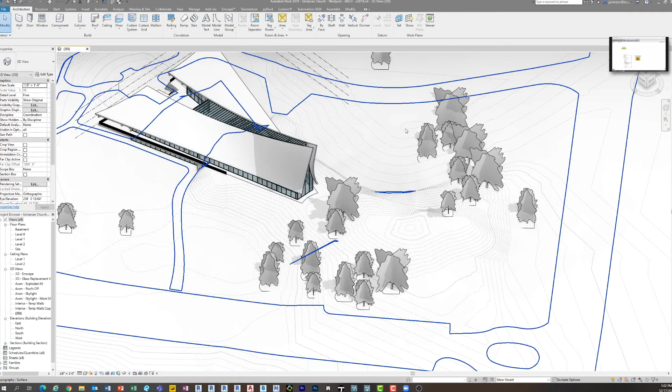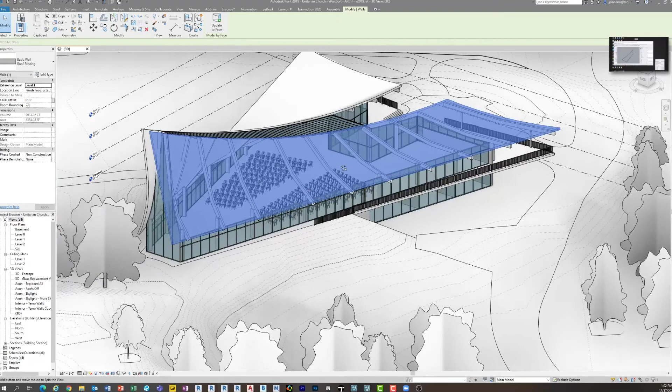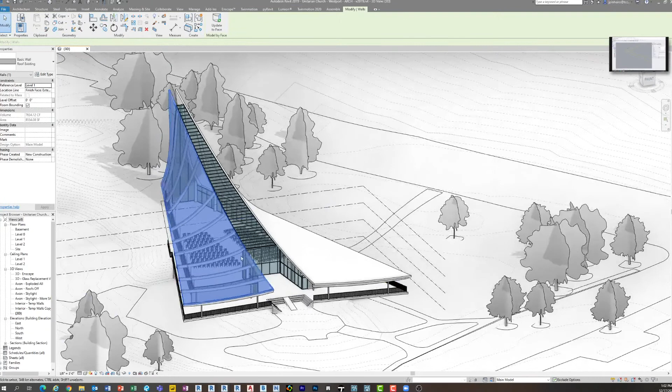Right now I'm showing Revit - this is a Unitarian church we're working on in Connecticut. As I spin around it, you'll see it's got a pretty funky roof shape. It's actually pretty neat, a really cool looking building, wood framed, built in the 70s I believe. I was tasked with modeling it. Modeling the roof took a lot of flexing and pushing and pulling a mass surface until it got right, then I did a roof by face, which is mirrored - very nice. But then came this whole thing - if I hide this roof for you guys, I had to show these huge timber beams that were underneath it.

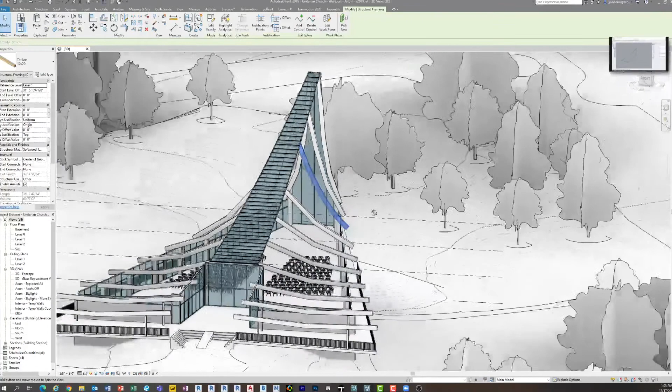It seems pretty simple, but then you start looking at it, and the curve at every single piece under this roof is different. So placing a beam along this is pretty challenging. I could have taken a couple different options, like making an adaptive component and trying to get it to deflect to it.

But I remembered a blog post that Marcello posted, which happens to be the cheat sheet from page 203 of his book, and that's how I did it. So what I'm going to do real quickly is show you how this works.

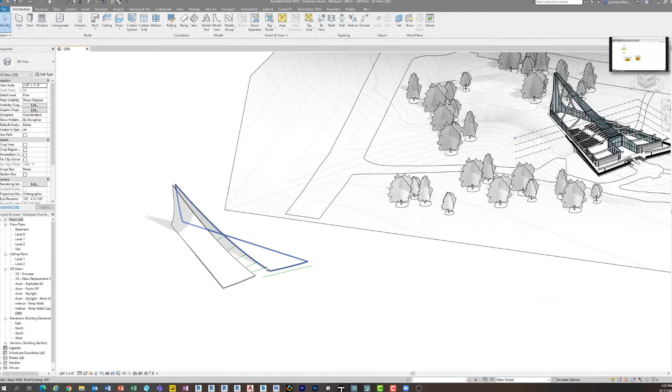So now I'm off to the side, and this is just the roof shapes and the model lines. You have a roof shape here and a roof shape here, and then I've got these model lines underneath it, representing the beams. If you were to look straight down on this in plan view, those would be your beams, showing the path of the beams.

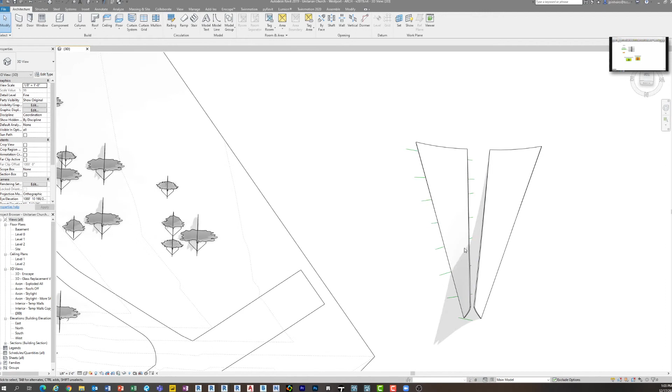What Dynamo's doing when I run this script is it's going to take those lines and project them using what's called project input onto that surface. From there you get points and curves, and it's going to place a structural beam along those points. So I could make these shapes pretty much whatever I wanted - right now I'm just drawing a line. It's going to take them, project them onto the surface, and then place a beam there.

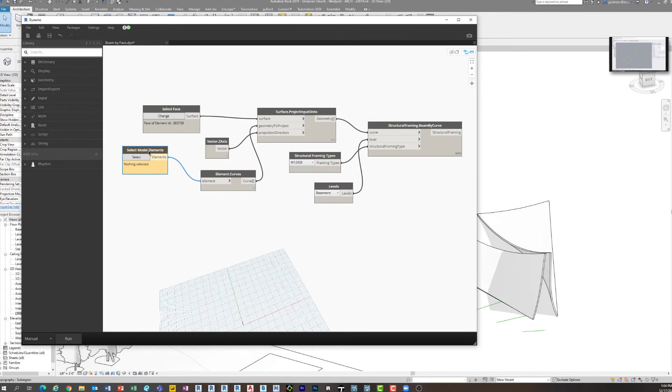So all you have to do is select model elements. Here I'm going to select my model lines, and then make sure I select my face. I want to make sure you guys can see both things running here. If I look really quickly at the Dynamo script, it's pretty straightforward.

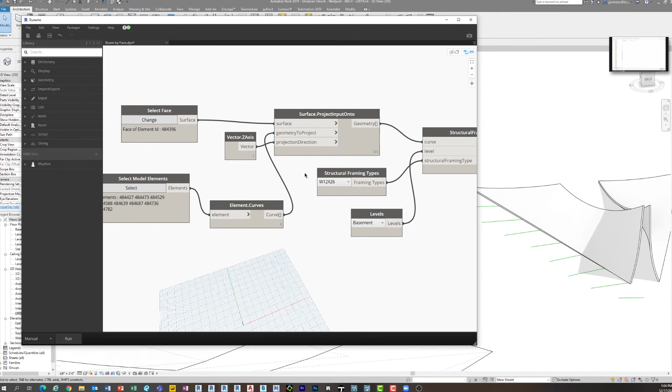You select your elements, and here it's actually projecting those elements onto the surface. Then there's a Dynamo out-of-the-box node called structural framing beam by curve. A curve is essentially a line in Dynamo, for lack of a better term, and it's going to place them along that. If I click run, Dynamo's going to chug for a second.

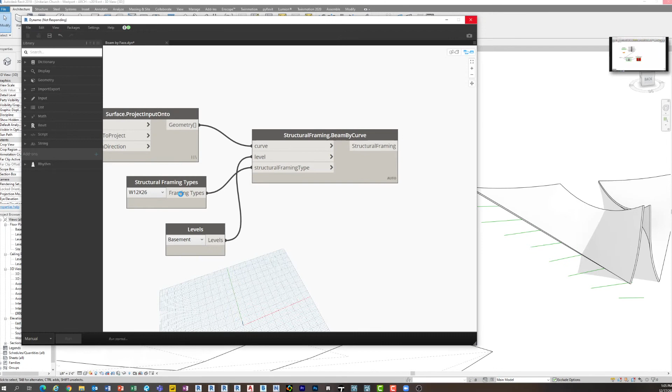As you can see, I actually picked a W12 beam - I probably should have picked the wood beam on this one, but that's okay. So you can pick the beam type. Now Dynamo's running, and it's projecting, and then it's going to place the beams on that surface.

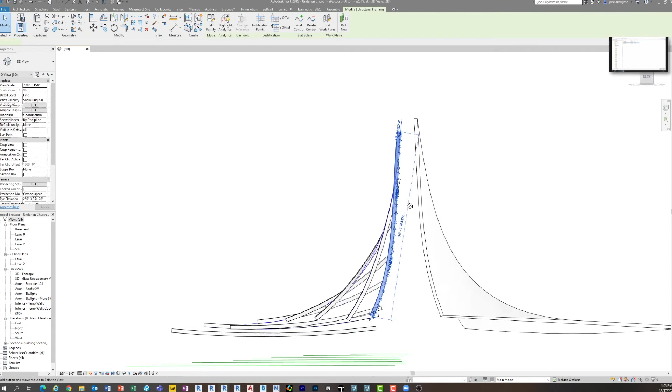So here we go. And now if I hide my roof for now, you'll see I have beams, and they're actual Revit beams, following that surface. Super cool, and honestly super practical, because you may run into crazy roof designs in your lifetime, and I'm sure we all do. So that's the example.

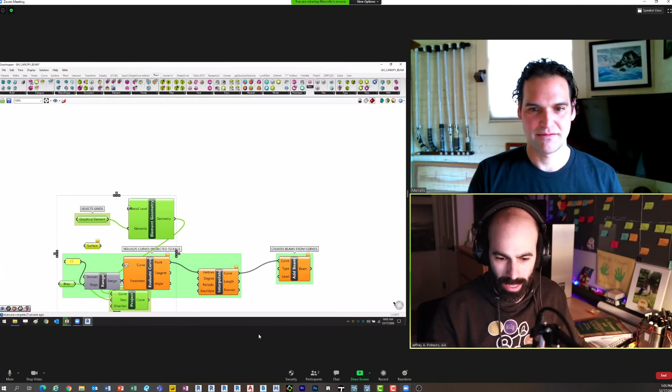So with that, what I'll do is quickly jump back over so that we're seeing everybody again. All right, I know you couldn't see that, Marcelo, but I think you imagined what was going on. Good, so that's the example in Dynamo. I thought that was a cool example because it's practical to the point where you could actually use it right now on a project, maybe something like a crazy canopy.

Probably the most practical use of a roof shape like that, as far as dealing with the space underneath it, is a canopy. The wavy canopy is something that's probably more useful. I've used that technique now on a couple other things.

That project onto technique is super powerful. If you have a surface, a wavy curve, anything, taking just a straight line, projecting it onto it, and then using that to draw things is extremely powerful. So with that, I'll let Marcelo take over and talk about how this looks in Rhino slash Grasshopper slash Revit and that whole good thing.

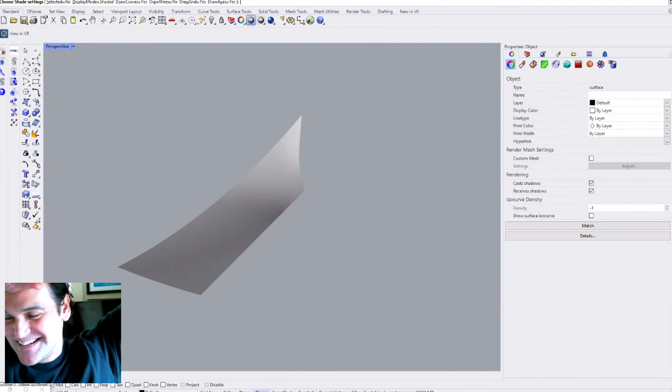Okay, can you see my screen? Yep, I can see it. It looks like I see Rhino, and I see one side of the roof of the church I just showed everybody. Right, okay, that's correct.

So the idea here is I'm going to show that same example, but in Grasshopper, and how you may reimagine using Grasshopper to do this example. So when Jeff built the roof surface in the massing environment in Revit.

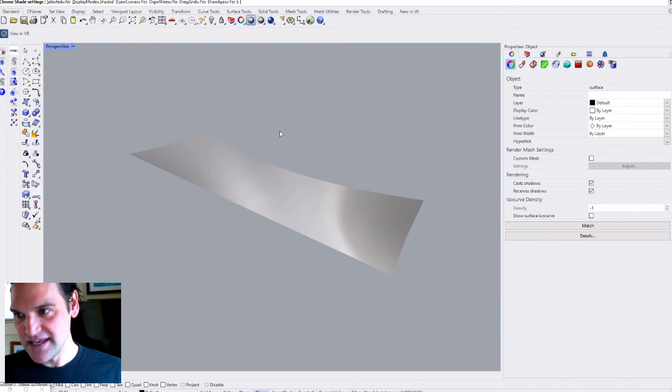Now, if, for example, you have another situation where you model the roof surface in Rhinoceros because either you're more comfortable modeling it or someone gives it to you, this is that particular surface.

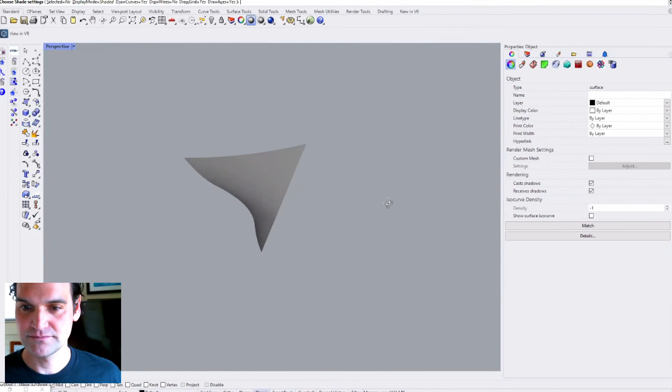Which I should jump in on actually, because that's probably a more practical use of this than anything, because I would say 90% of the time my experience with Rhino is someone modeling it and giving it to me, and then me having to do something with it. That's usually most of the experience. And then you're like, well, what am I supposed to do with this? This is a perfect example, I think, of interoperability mixed with geometry and practicality.

Okay, so it brings up another good example of why, if you know how to do it in Dynamo, would you need to learn to do it in Grasshopper? Well, what if, like Jeff said, you don't get that surface in Revit and you get it in Rhinoceros instead? Then what do you do? Well, the Dynamo solution is not going to be as efficient for you as using the Grasshopper solution. So let's just get into it.

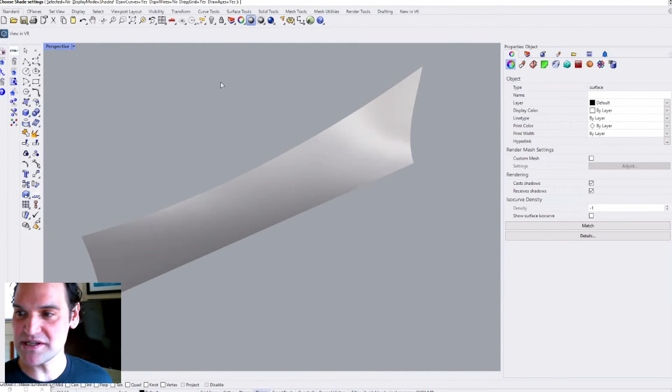All right, real quick, here's the surface. So what you want to do is get this eventually referenced into Revit, and for that we're going to use the new Rhino inside Revit technology.

Now, I set kind of all this up, but quickly, inside of Revit. Where's my Revit? Hang on a second. I've got a lot of windows here, Jeff. Multiple monitors, right? Yeah, multiple monitors. Here we go, here we go. I do have multiple monitors. Okay, oh gosh, I just had it. Okay, whew, here we go.

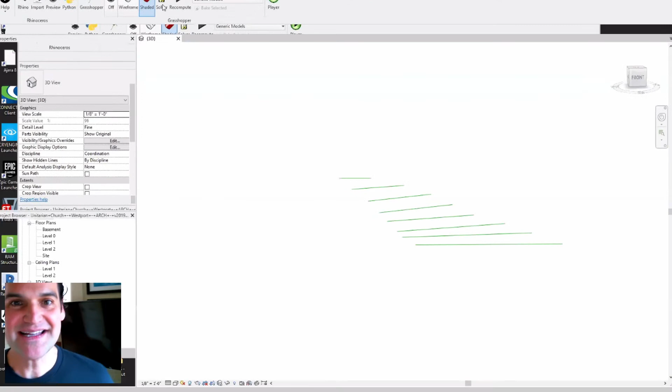Inside of Revit, if you have Rhinoceros 7 now, which has been out a few weeks, you can also get the Rhino inside Revit plugin, and it would show up right here on your tab. So you would get this whole menu for the Rhino inside Revit tools, and I'm going to show you how to use it.

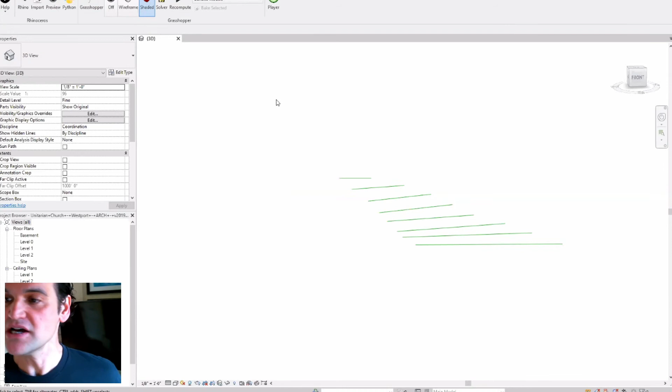So the first thing you need to do is, let's say, for example, we have the model lines inside of Revit, but we have the surface inside of Rhinoceros. Maybe these match grid lines or something, so it makes sense to do them inside of Revit. I don't know, for whatever reason.

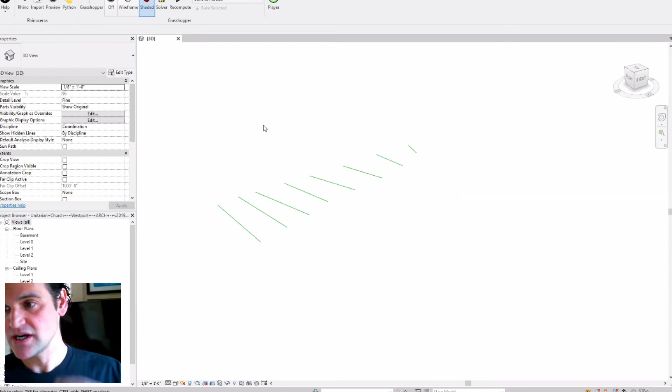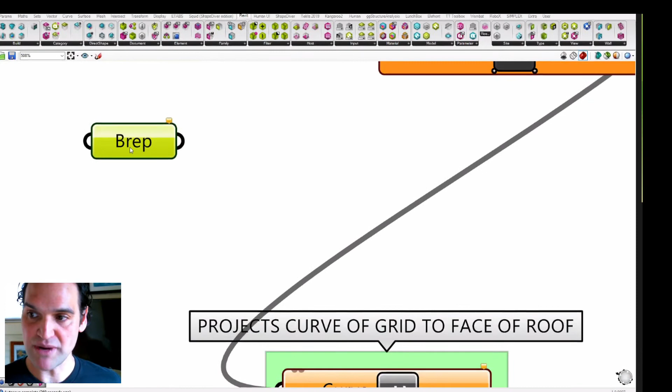Okay, so the first thing you need to do is: all of your computation is going to be done inside of Grasshopper. Grasshopper is going to be the conduit to get from Rhinoceros into Revit. So we need to get it all into Grasshopper geometry. We're going to open up Grasshopper - I already have the pre-built script here. So basically this node right here, Brep, we're going to select it out of Rhinoceros, and then it's going to convert it from Rhinoceros geometry to Grasshopper geometry.

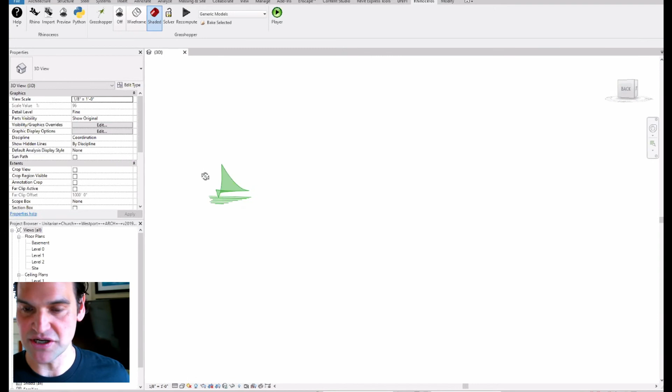The good thing is that Grasshopper geometry could also be previewed in Revit. So now you see Grasshopper geometry previewed in Revit, and it's looking pretty good, right? It's also good because you can see that it's all lined up and coordinated.

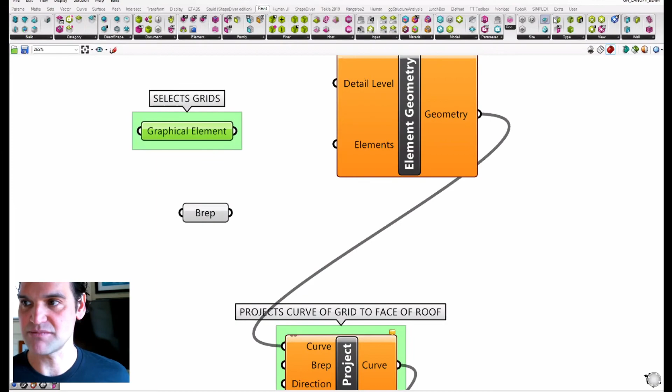Okay, next thing we need to do is turn these lines into Grasshopper geometry. So we can pre-select them, and then go back to Grasshopper here. I've got a lot of windows, so here we go. This particular node right here, select graphical element - that's going to be selecting elements out of Revit. So then I'm going to say select multiple elements, and now it sets it to Grasshopper geometry. So when I go back to Revit, you would see that they're selected.

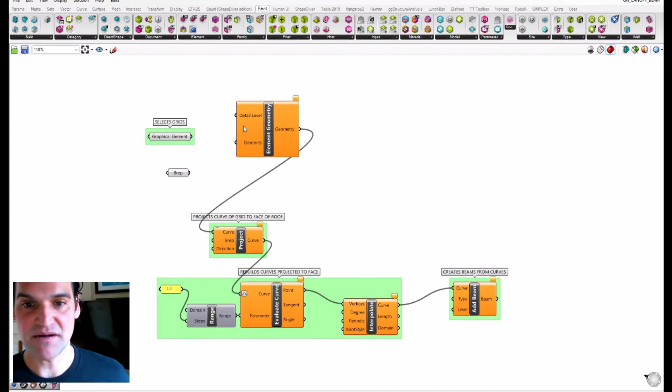But anyway, okay, so now that we've done the selecting part, we can move on. If we go back to Grasshopper, what we do is, I won't go through all of it, but basically we need to extract the lines out, and that's this one, element geometry.

In Grasshopper, you'll see there's a tab called Revit, and in there it's got hundreds of nodes. One of them under element is element geometry. So basically we'll take Revit geometry and interpret it to Grasshopper geometry so it could be used.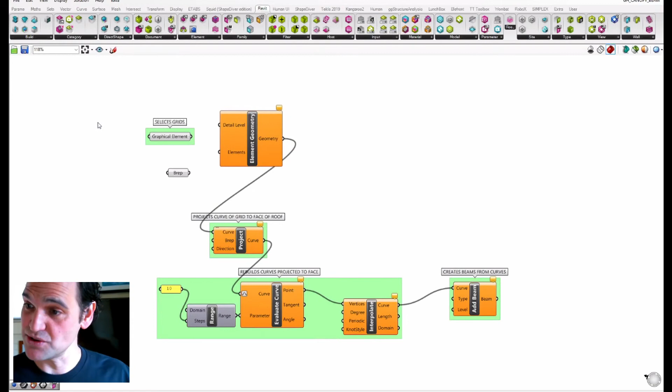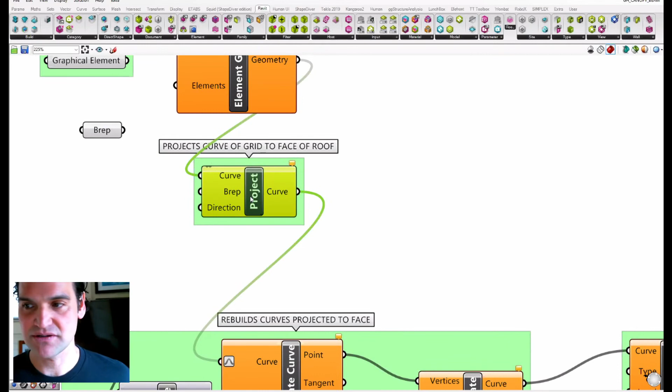So I'm going to use this, and then I'm going to use the project, which is just meat and potatoes Grasshopper. They have a project node just like Dynamo. And then I'm going to feed in a BREP. A BREP is basically a generic surface or a generic solid. It's kind of Grasshopper language.

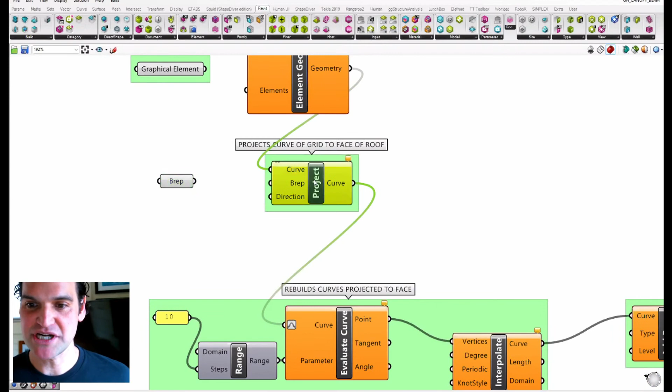So the projection says, give me a BREP, which is that surface I selected, and give me the curves which we're extracting out of Revit. So I'll feed that in, that gives it the curves, and that gives it the BREP.

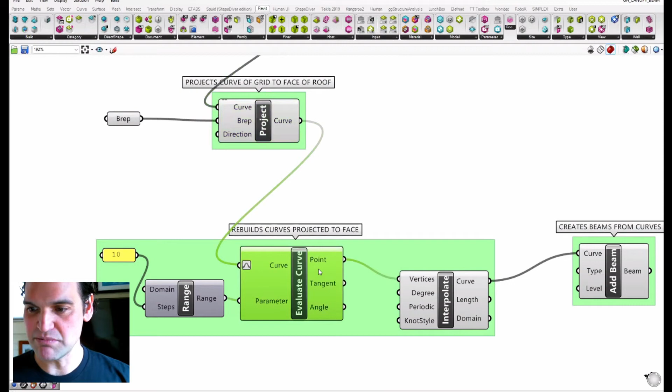And then I'm taking the curve, and because of the way the curve is defined using a NURBS formulation, we basically just need to rebuild it so that Revit can interpret it a little easier. That's what these few nodes are, and it's all spelled out in the book.

Over here is the pretty one, the add beam node, which is just like what Jeff showed, structural framing beam by curve. This is the same thing. It defaults a type and a level, so I won't mess with that.

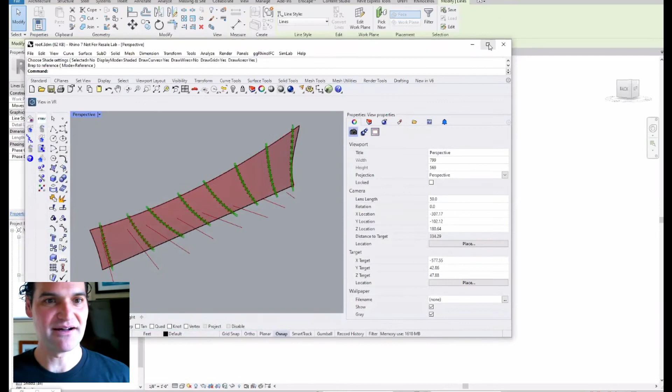But there they are. And then we can see inside, it also previews it in Rhinoceros. And then boom, there they are inside of Revit. And those are Revit beams, right?

They are. I'm going to click and look here. Oh, and we actually have a timber—there you go, so pick that one up. Yeah, so these are actually Revit beams.

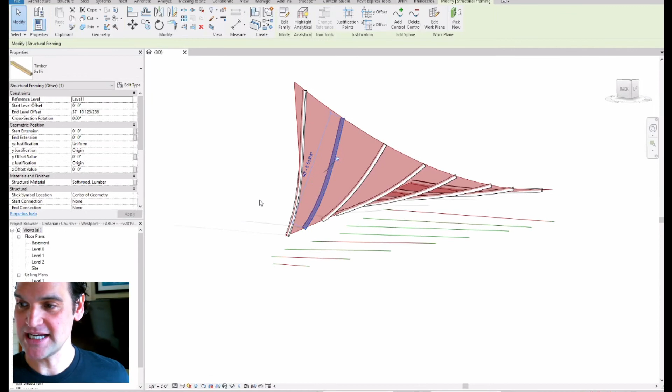Now all this geometry is being controlled by Grasshopper, and this surface is being controlled inside of Rhinoceros. So if that surface in Rhinoceros were to change or shift, then these beams would automatically update.

Yeah, cool. So real quickly, before we jump on, and remember guys, this is live, so feel free to ask questions. I noticed that beam was pinned, which is pretty neat.

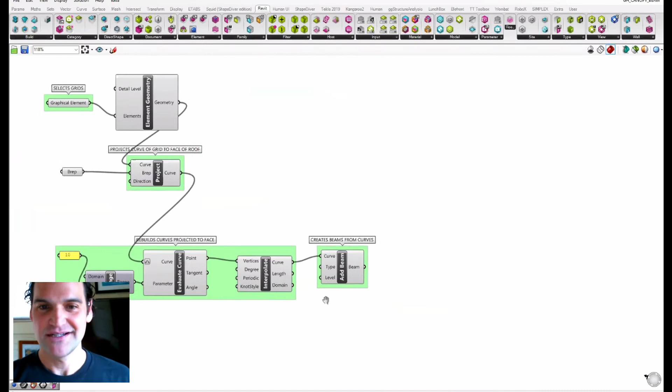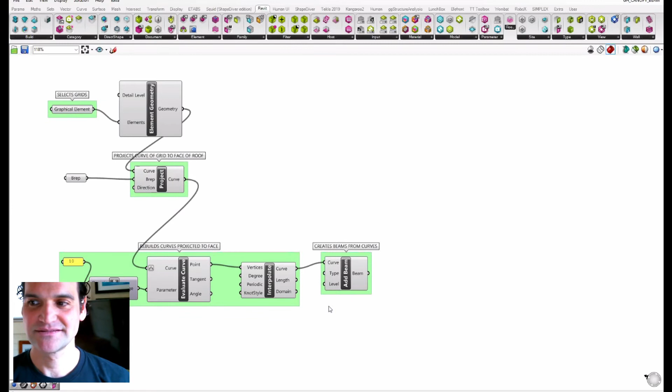So in my example, when we do beam by curve, it's placed and it has all the points—you can see thousands of points depending on how complex it is. But the pin piece is kind of interesting. So you're saying that's pinning to the Rhino geometry, and if you want to, you can unpin it?

I actually never tried this. This is awesome. Yeah, very good question.

If geometry is being controlled by Grasshopper, it will pin the element so that you cannot move it out of place, because it's another recognition that this is being controlled by something else. Now, you could unpin it, but if you unpin it, you're severing the link between Revit and the Grasshopper control.

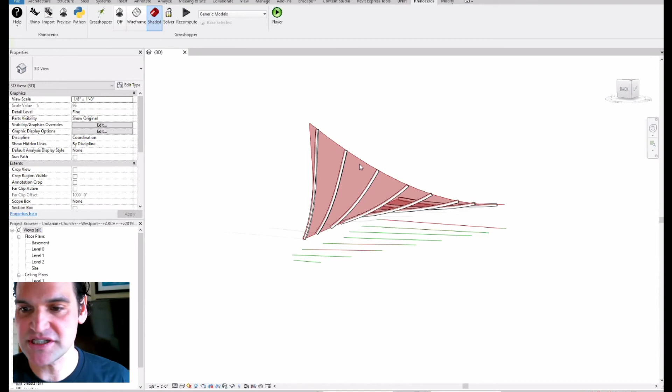Which might be okay because maybe you only ever use the Grasshopper script once. You're done, production does this, and now they come here and maybe they unpin it and maybe they change it to a different type—maybe it's a steel beam now, or something along those lines.

Yep, so that's one thing. Now another thing is you could change the type using Grasshopper if you wanted to. That's a separate page in the book. That's awesome, no, that's great.

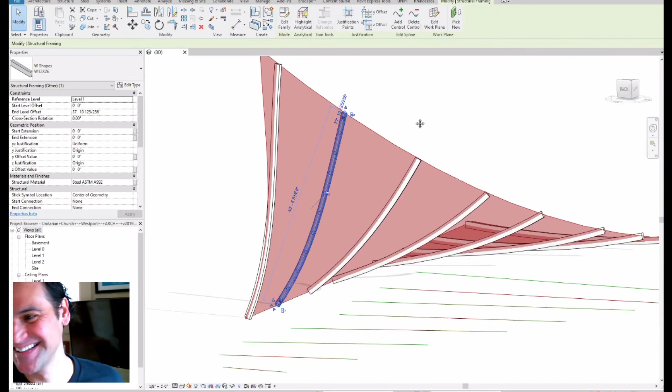That's really cool. And so I assume this geometry, this beam, is now a Revit element, so it has its own... It's literally living inside of Revit, but it's being controlled by Grasshopper until you unpin it, at least, right? That is correct.

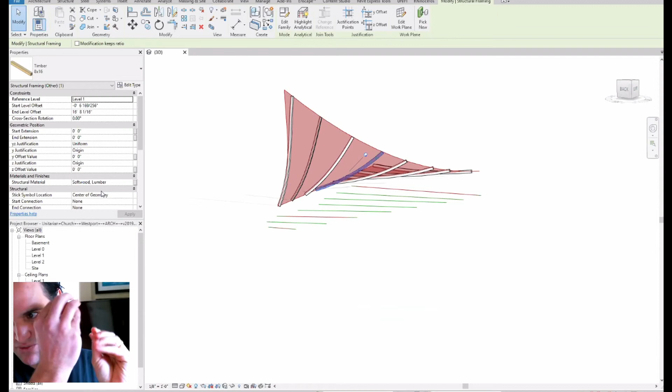And the good thing here is that if you've got a good grasp of the Dynamo and Revit relationship, you will relatively easily pick up the relationship between Grasshopper and Rhinoceros and Grasshopper and Revit, because you're already in that mindset of thinking about how those relationships work and how each has its own unique geometry.

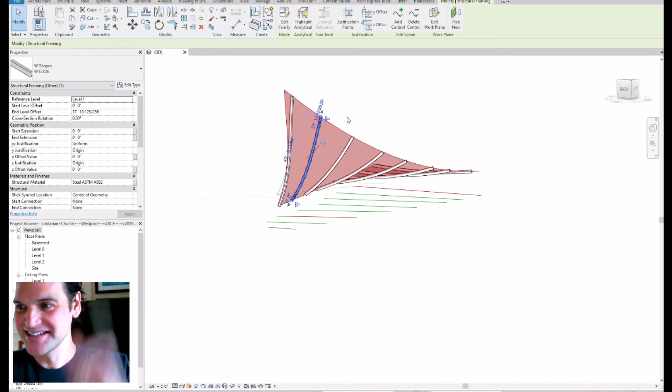Now, I may be getting into the weeds a little bit, but if you unpin and then repin it, can you do that, or once it's unpinned, that's it? The moment you unpin, you sever the link. Yeah, that's kind of what I assumed. But these bring up very good questions.

Should you pin? Should you unpin? It's all about the workflow in your office. Maybe you have individuals building surfaces in Rhinoceros, and then you're building the beams in Revit, and so you need to have those conversations, because each project, each workflow is going to be unique.

That's the beauty about the book and this tech, is that it gives you the flexibility to do what you want in your office based on your workflow. For people who aren't super fluent in Dynamo or Grasshopper, if you at least use the conceptual modeling environment to make a surface, if you have to make a Zaha Hadid type of building, and you're using Revit, it's that idea of doing a wall by face or something by face and then deleting the mass. Once you delete the mass, save as, close the project, guess what? You cannot control that anymore.

I think this is a little more flexible, but it's a similar idea. Think about downstream use of that mass, and will it change? Will you want to be able to modify it, right?

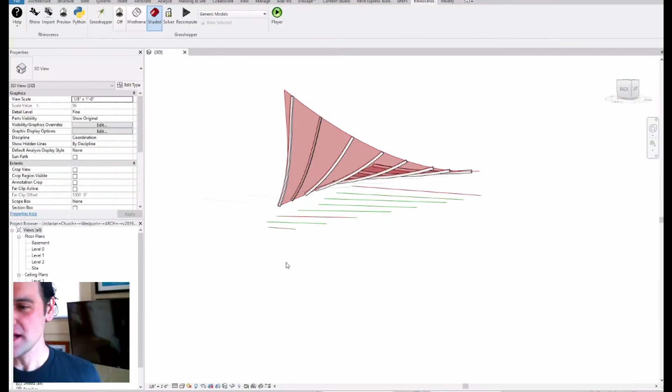Can I add a few more things since we're in the now with this? You heard me mention that the particular example you showed, page 202 and 203, is on a wavy canopy, how to project the beams. Very similar to this. I mentioned that you could physically change the types yourself, or you could change the type programmatically using Dynamo or using Grasshopper.

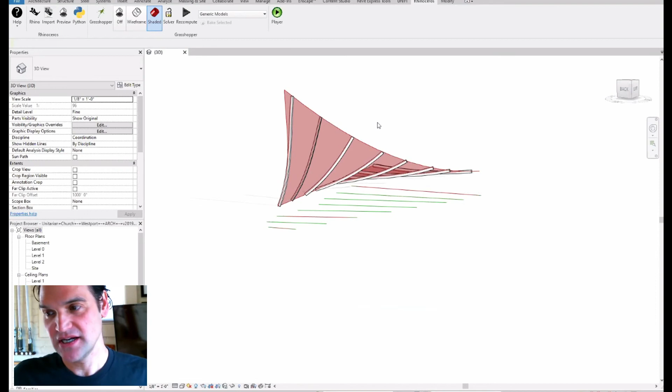So the idea with the book is it's not meant to really teach you content. It's meant to teach you concepts. So the concept of this is to project something onto something and build something.

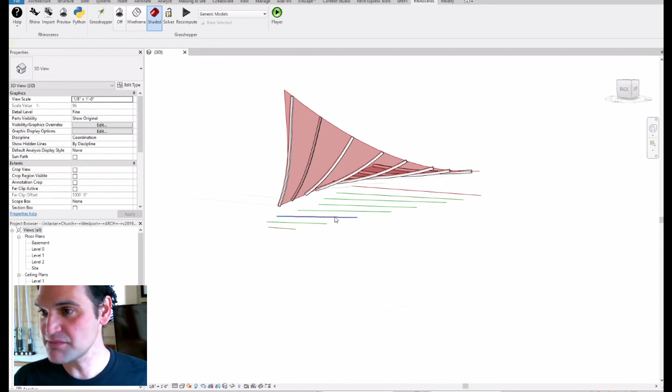That's the best way to say this, because in my example, I'm actually using grids, and then the grids get turned into curves and then get projected. But so what? What if they're grids? What if they're model lines? What if they're edges of slabs? It doesn't matter. The fact that this is a roof surface - it could be a roof surface, it could be the underside of a ramp, and so on.

Do these have to be beams? No, maybe they're piping or something else. Maybe they're the top chords of trusses. The point is that you learn these concepts.

So that's one. Two is each example is small so that they have concepts. So if you wanted to change the type, you take the example from that page and then you can plug it in. Now you have page 202 concept to make it. Then you have page X - I don't have it all memorized - to change the type, and then now you can put them together.

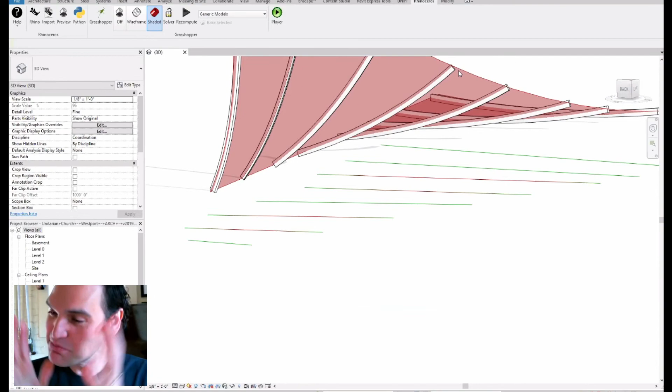And then another thing you mentioned is wall by face. There's another example towards the end of the book that shows you how to do wall by face, where you can take that concept and then put it together. Now you have three concepts together to make a more complicated script. That's kind of the idea. And in the book, the front few pages is a table of concepts, not a table of contents.

When I think about my journey learning Dynamo, it's very similar. I've called it in some blog posts and even in my courses, peripheral Dynamo. You learn something like this, or maybe pipes is actually a good example. You learn in Dynamo how to - one of the first things I learned was placing a fence using an adaptive component on a topography.

And this was before you could host railings to topography, and it was a perfect example where I learned that, and I was like, wait a minute, if I can do this, well, then I can put piping on a topography, and I can just shrink it down 3 feet, and now I have a conduit run that always has 36 inches of cover. Those are the things that over my journey of learning these programs, it makes complete sense that you learn one thing, maybe learn another thing, and then all of a sudden it's like a bell goes off, and you're like, oh, well, I can use this to do that.

So with that, I think that's also why I enjoy the cheat sheet setup like you've done here, because that is exactly what it does. It sparks ideas, and then you can run around and do whatever you want with those ideas, right? And that's the goal.

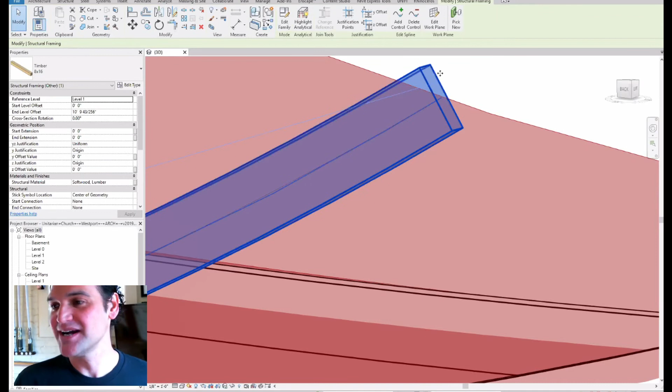In fact, as I was talking, I was looking at this. Do you see how these beams are actually placed at the center by default? Well, you could go over here and change them to top, or do it programmatically. There's another page in the book that shows you how to get and set parameters, and you can take that concept, put it here, and change the parameter from center, from origin, to top down, or whatever.

Yeah, no, that's exactly right though. That's you start to see all of those things as it unfolds.

So I did want to talk about this because I think it's a really cool concept before we run out of time here - the way that you index this book. In the back, instead of a typical glossary or index, you did a Dynamo nodes index. I thought that was pretty neat. So maybe explain a little bit, and I'll try and show it - I know not everyone's going to see it - it's called the table of concepts versus a table of contents. The way you highlighted solids and volumes, I think, was super helpful.

I actually found it right in the example we just talked about. It must work, right? Because I found the post from 2 years ago that I did on my blog, and then I searched and looked through your table of concepts, and found page 202, and that's how we started the discussion. So it works, but I'd love to hear your theory behind that.

Okay, very good. The idea with the book is it's very unconventional, by all standards. I thought, well, early screening of the book from Grasshopper and Dynamo users - the common question was, where's this? How do you manipulate the view cube?